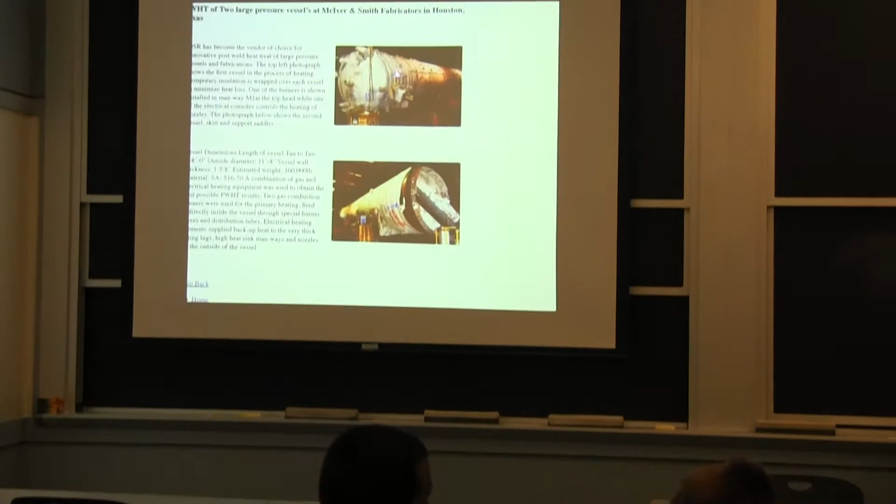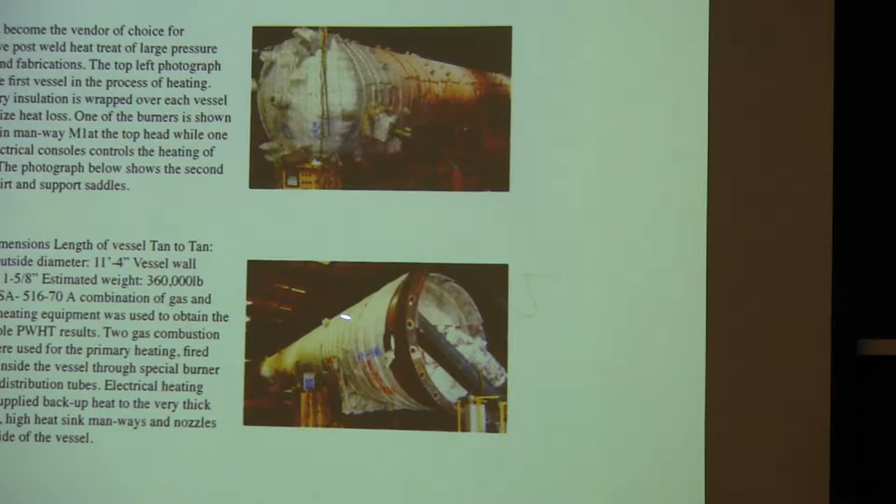Here's a vessel they just wrapped - they put electrical blankets around it, virtually over everything, and then wrapped the whole thing in insulation. Here's another one. If you search online, there's a bunch of pictures of on-site stress relieving.

And it has to be done - you either do thermal stress relief or mechanical stress relief if the parts get very large, because the residual stresses get to be huge. I told you the story about the weld with 400 little welds in it - that big piece came off a 7,500 ton forging press. They didn't do proper preheat or post-heat, didn't stress relieve, and didn't peen - which means hitting it with a little hammer every half inch of weld, beating the surface to introduce mechanical stress relief by deforming it. That's how we used to put together battleships with 14-inch thick armor.

No one remembers exactly how to do it, and no one wants to go build a battleship just to prove how. We don't really know how to weld 14-inch thick armor steels anymore, because all those people are dead.

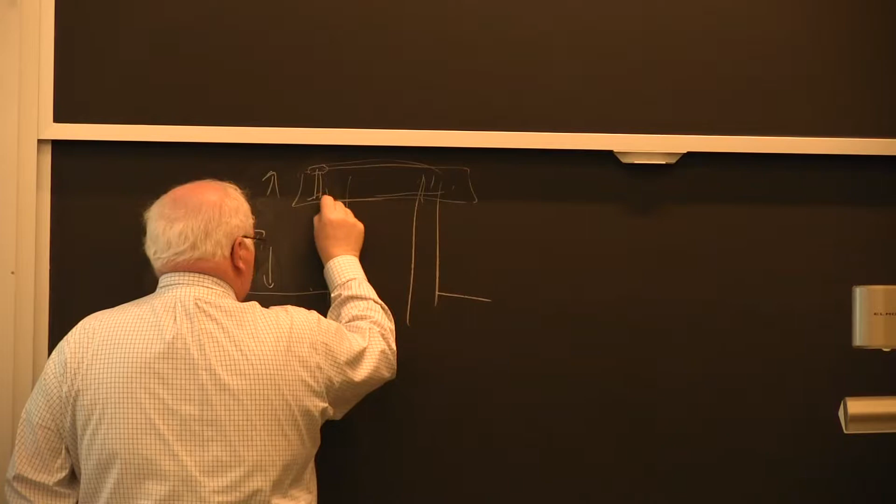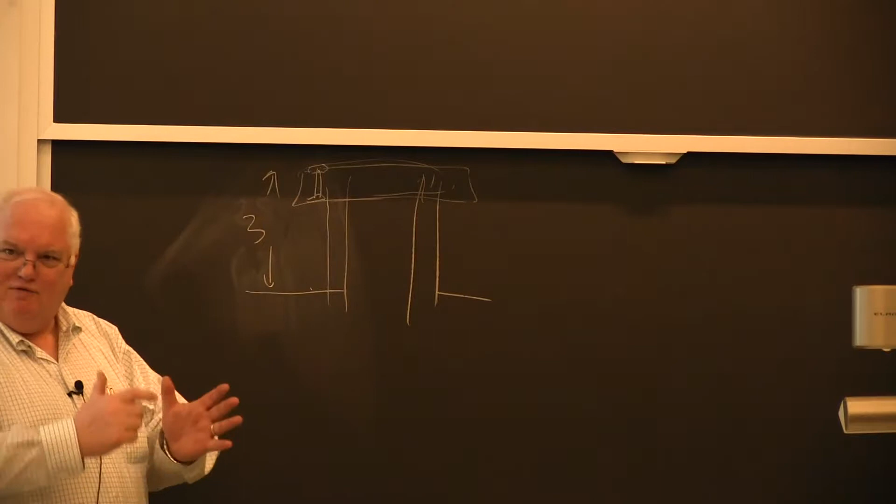And you've got this big set of beams up here. There are like 6 of these I-beams, and they're 10 feet high - that's a story right there by itself. They're 10-inch thick web, and they were welded together out of big forgings. I mean, this is not a rolled beam, okay? This is 10 feet high and 10 inches thick. And they were about, I don't remember, 50, 60 feet long.

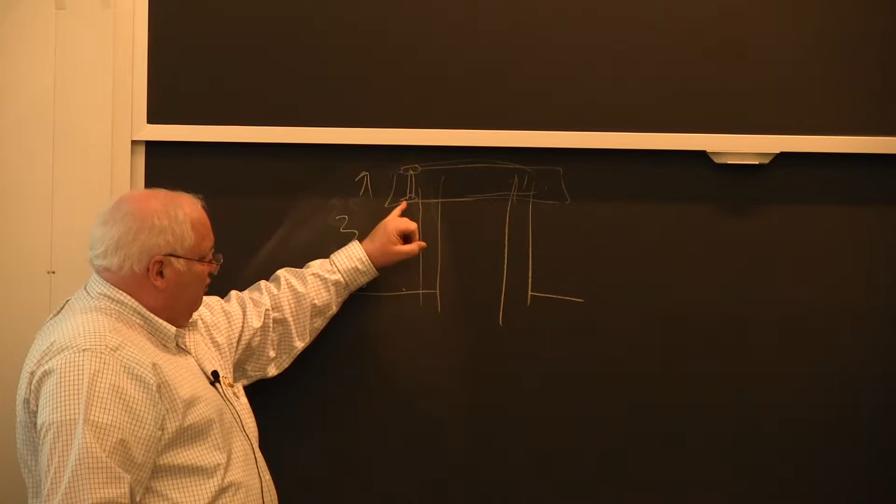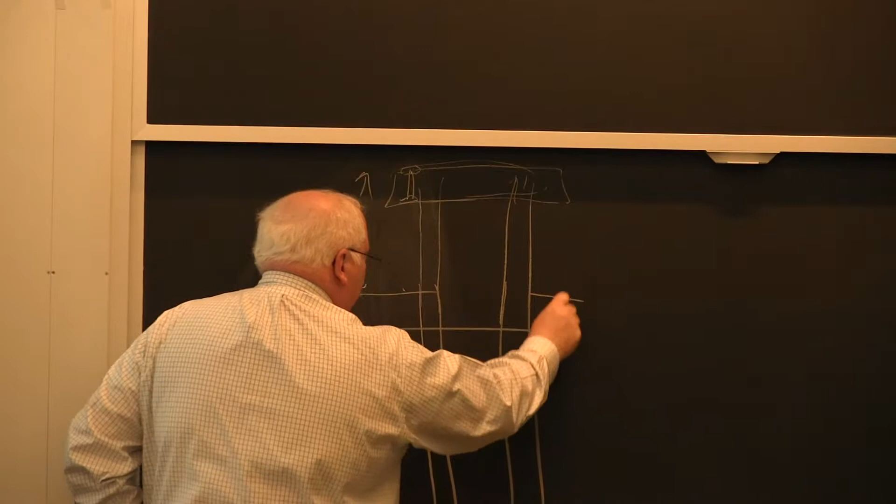And you couldn't make the whole thing as a whole forging itself, because you didn't have a forging press this size until you built the forging press. Anyway, they went 6 stories into the basement. You had this anvil down here that was a huge anvil, huge anvil that you're pressing against. But for all the hydraulics and other stuff, you basically had this thing going 6 stories down into the basement in order to run these.

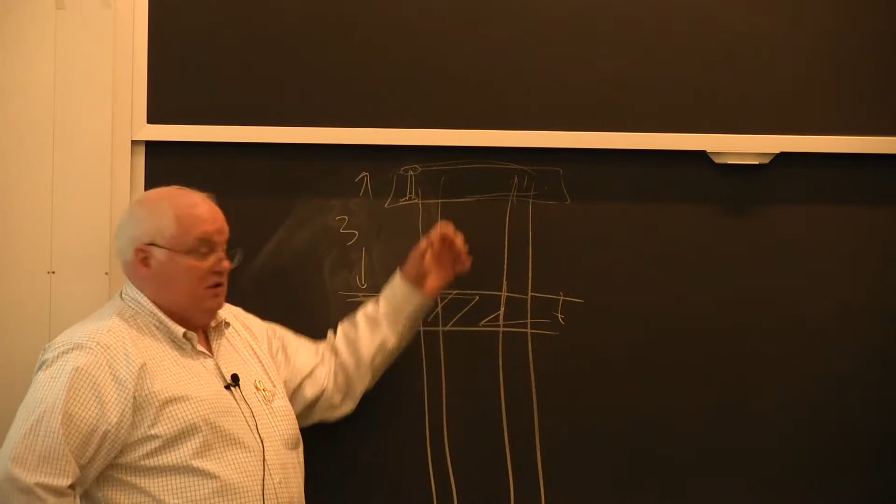This thing has to move up and down, right? So you've got to have another 3 stories going down, and then you've got all the other stuff. Well, the other I-beams down here, which were the same as that, were 6 stories buried into the ground. And so one of them developed a crack all the way through.

Someone was down there doing an inspection. They said, 'Oh, I see a crack. It's 10 feet long.' Okay, and they said, 'That's not good.' And they had 6 of these beams. Well, they had to shut down the machine.

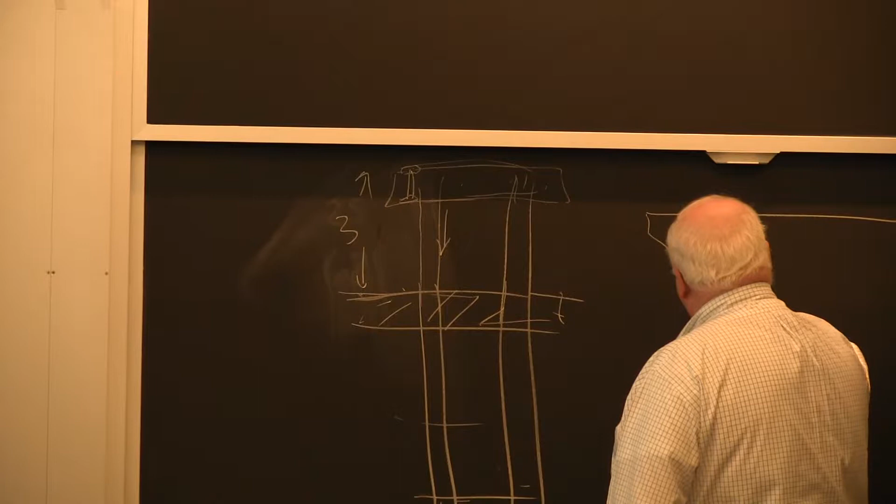Well, it turns out the beams actually from the side had a taper to them, like this. And what they had done is they had welded on a little pad to erect this thing. When you're trying to put it in the pit down here, they had pads on either end just so you'd have something to sit on, because this was a slope, 45 degrees. And they had welded these on. They were about the size of my notebook if you made it into a cube. Okay, they were not small.

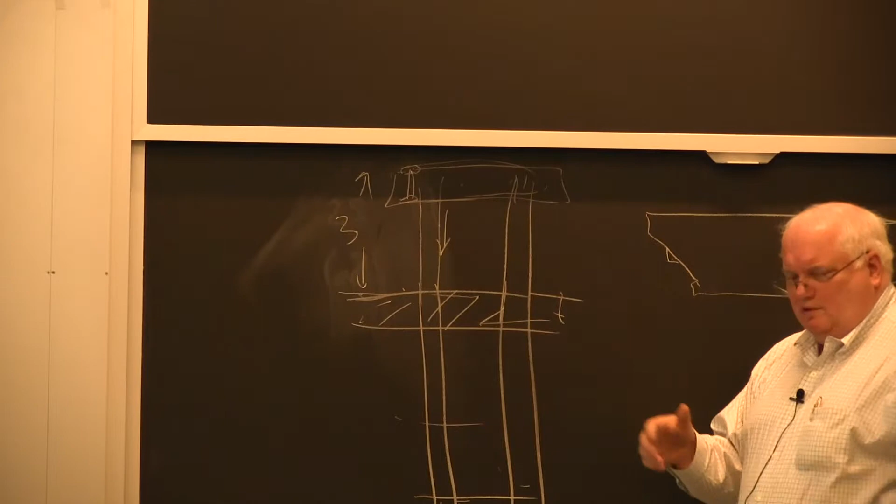They were about 10 inches wide and stuff, and they had welds on there that were 2-inch fillet welds, which means they had yield level residual stresses. And after about, this occurred in the mid-80s, so after 30 years of use, they developed a fatigue crack that started at the toe of one of these and went straight through it - a 10-foot crack.

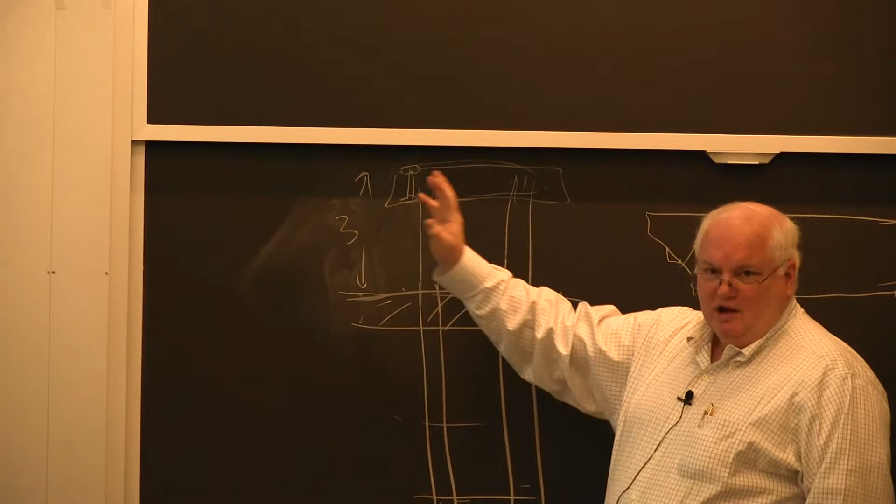Well, to build a new one of these, they estimated, would cost $2 billion. This is the whole thing, $2 billion, because it's not just the machine, it's all the hydraulic pumps and everything else. It fills a whole building, okay, a huge building to do this. And we only own 2 of these in the United States. One at Wyman Gordon, which is now bought by the Germans, okay, and Alcoa owns the other one.

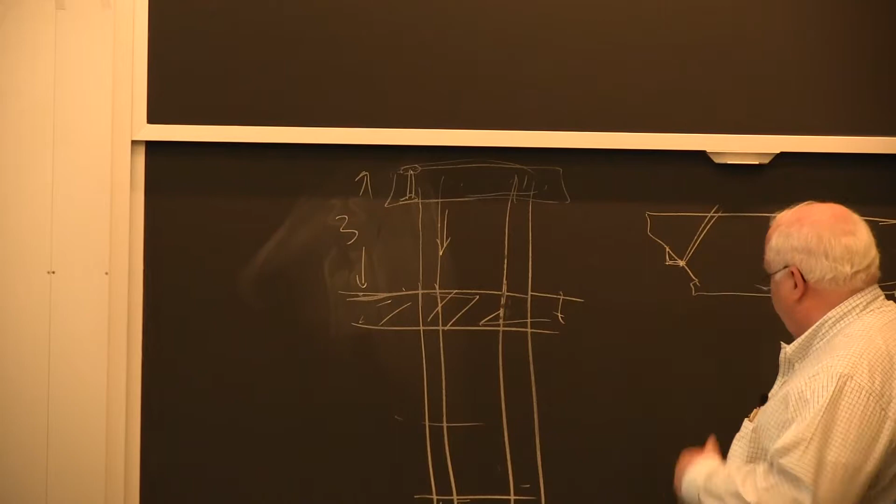Anyway, it was because of weld residual stresses. It wasn't a hydrogen crack. It was 30 years old, but it was weld residual stresses and a stress concentration. The fatigue crack went through here, and I had to go down in the elevator and see this thing. It's a little bit greasy down there, okay, about 2 inches of grease everywhere. But they had an elevator to go down there.

And I looked at it, inspected it, and they said, 'Well, how do we weld this?' And I said, 'Well, you're going to have to preheat it.' Anyway, I went through and helped them, we talked for a couple of hours about what you might have to do and how you're going to stress relieve it.

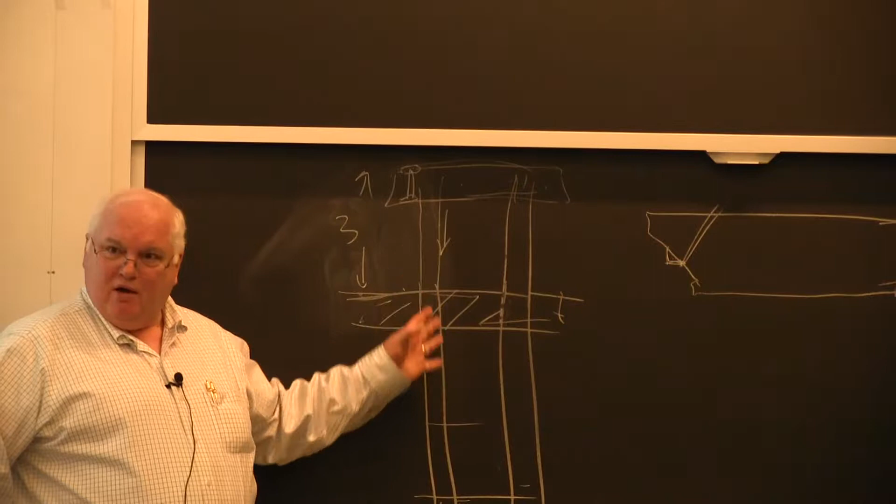And I said, the best thing for stress relief is if you can put it in a furnace, right? Well, can't we do it in place? Because it's not the easiest thing in the world to get a 50-ton beam out of the 6th floor basement when the only access you have is an elevator shaft. In fact, they were going to have to disassemble a fair amount of this forging press in order to even get the beam out of there.

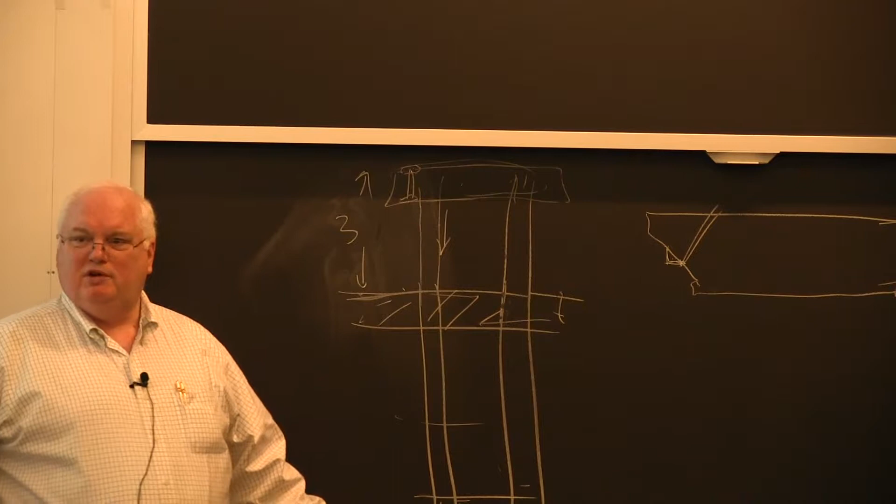Eventually, they did decide to spend the millions of dollars to rig it out, weld it, stress relieve it in a furnace, and put it back in. Cost tens of millions of dollars to make that repair weld.

They had to grind the crack open. I mean, this is 10-inch thick, so this is going to be a 10-inch thick weld. So you've got the two pieces, and you're going to have to prep the ends.

So we discussed weld prep. You saw the one I had that I passed around, and you don't do a 45-degree angle because then you're going to be putting in tons of weld metal. You do a narrow groove instead, and should you do a straight bevel or can you do a compound bevel? Where you have two different angles that you machine on here, or you do a J groove—there's lots of things you can do. But those are ways we were talking about how to minimize the amount of weld metal, but still have enough angle that you get good fusion. Go to a straight-sided weld, you won't get good fusion.

We do have something called narrow gap welding. The Japanese spend a lot of time and money on narrow gap. We use it on the surfaces of aircraft carriers. The top deck of an aircraft carrier is 4-inch thick steel. So we use narrow gap processes, but you've got to develop the procedure, and it could take you a year to develop a good, reliable narrow gap procedure.

Yes, Jonathan. They could.

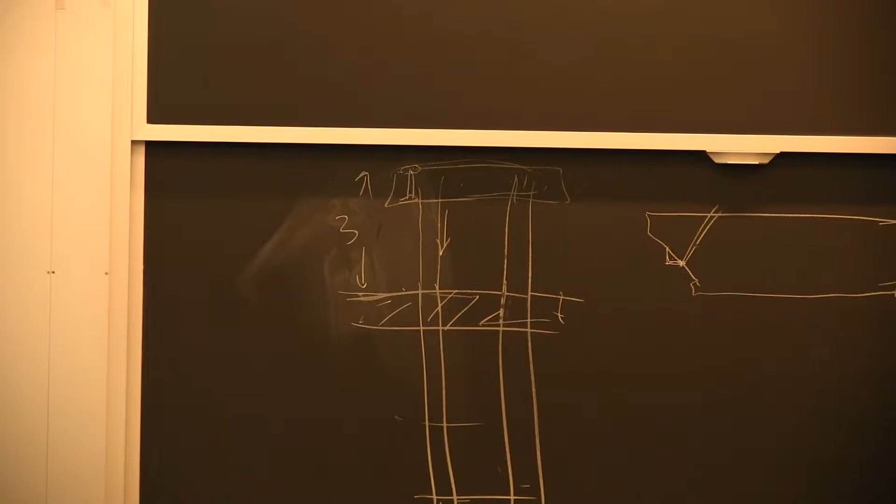A new forging will probably have a 1.5 year lead time. They thought about that, but they didn't want to be down for 1.5 years. They got all this turned around in about 3 months. They were doing all the economic analysis on whether to go buy a new one, but buying a new one doesn't solve it, because it was still welded together up there too—the flanges were welded to the beam, so you still had to weld the thing.

And the thing is, it had been welded in 1950. In fact, I found an article from 1954 in the Welding Journal that talked about this, because it was such an unusual weld at the time. They made a special feature article in the Welding Journal about building these presses.

Well, come 1985, when we needed to weld them again, we had to find out—so we were going back looking through the literature to see what procedure anybody used. They had lost the procedure. It can take months to develop a procedure. Well, it did take about a month, and it wasn't just me—they must have brought in half a dozen consultants, because it was tens of millions of dollars.

Okay, yeah, what other questions? Yep.

Oh, this forge will do titanium, steel, whatever you want. It's just 50,000 tons. Once you've got a 50,000 ton hammer, you can put anything under there. It's just a question of what dies you put in and how fast you run it—you change your parameters for forging aluminum.

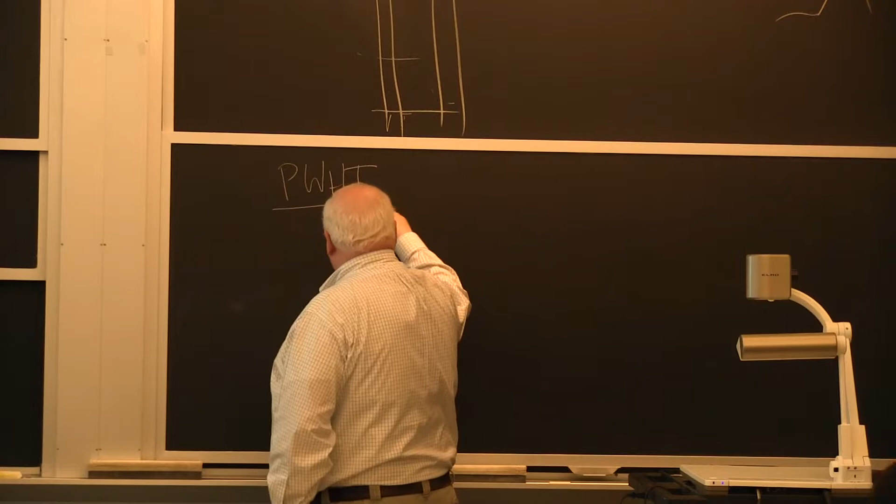Now, we've talked about preheat. We haven't talked as much about post-weld heat treatment. I think I may have told you this already: there are 3 reasons to temper.

You temper the steel for low hardness. You lower the hardness, and I like to just call it HV, Vickers hardness, but it can be Rockwell C, whatever. You also temper it to relieve residual stresses.

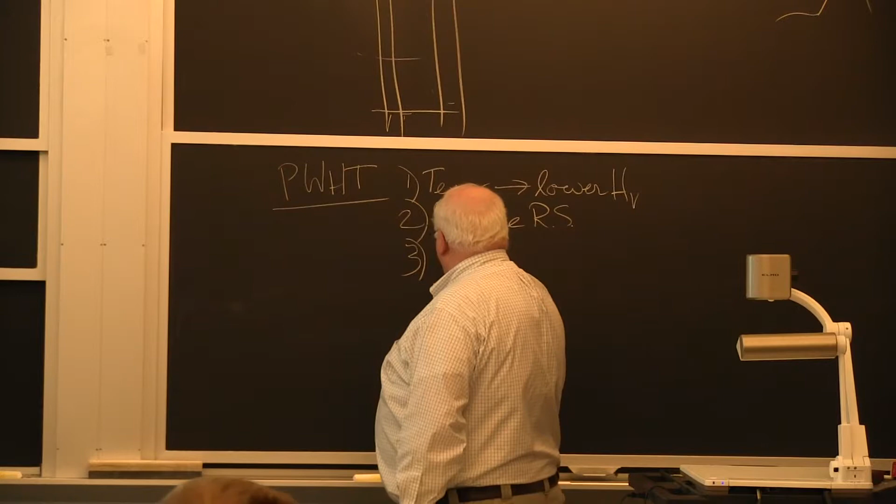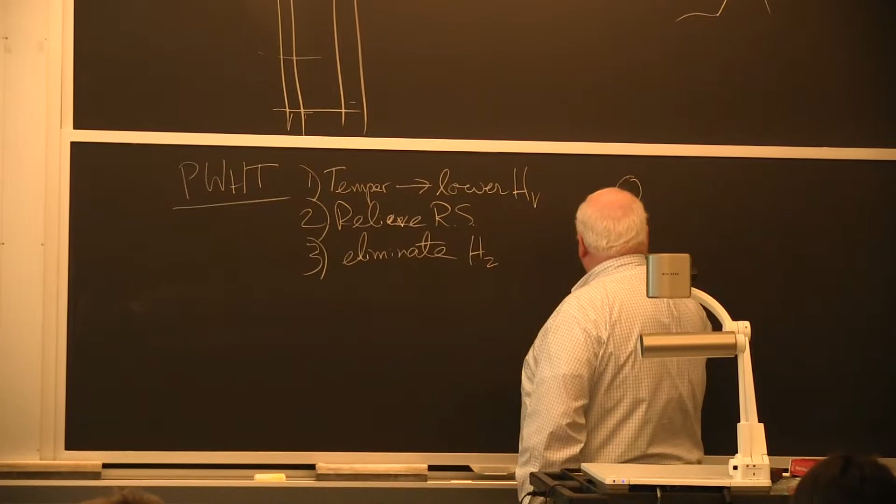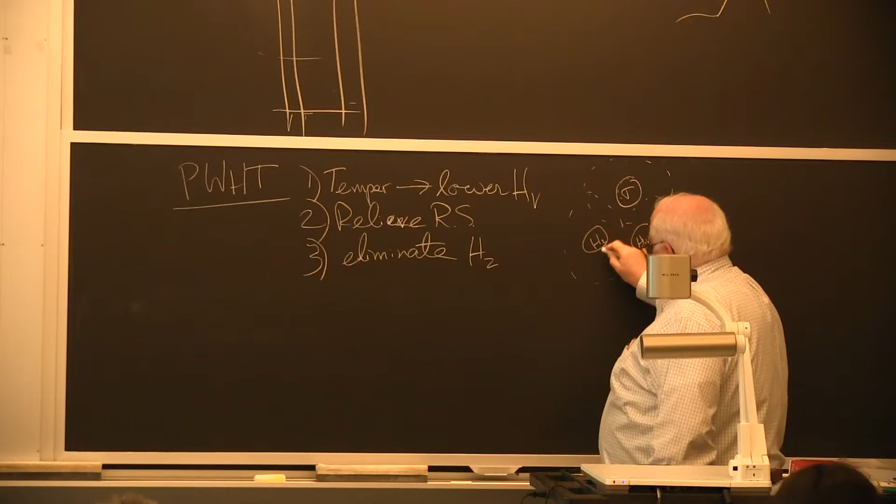And the third thing you do is you eliminate hydrogen. So on this one, think of the Venn diagram, I had a little circle and a little circle: I relieved the stresses, I've reduced the environment, and I've reduced the hydrogen. I've reduced the hardness. So this is hardness HV, stress, and H2. By post-weld heat treatment, I do lots of good things. And if I properly post-weld heat treat, I probably won't get a hydrogen crack.

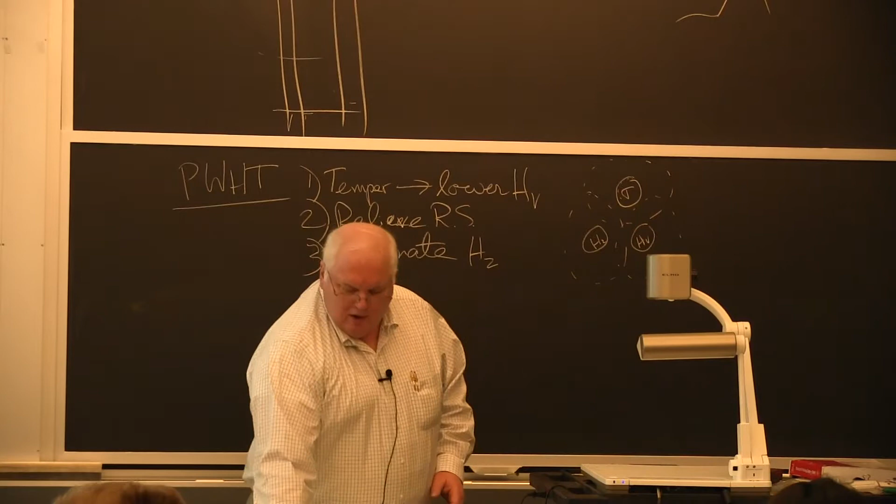And I told you about the Helms project, about that. Now, how do you do it? What procedures do you use? Mike Baumforth was talking about the structural welding code yesterday.

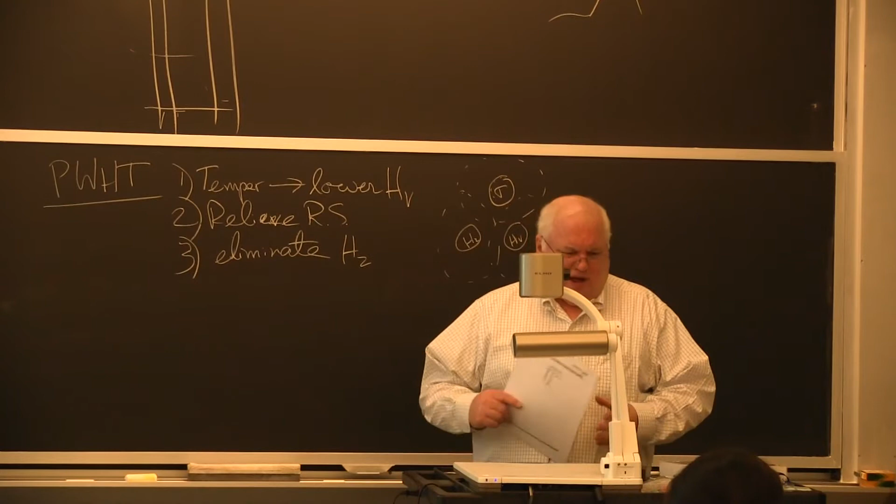And here are some of the welding procedures per the structural welding code. Mike mentioned that you can take the certified welding inspector exam by either doing the standard of API 1104 or the structural welding code. There's another code, and he showed you the API 1104, which is this little thin thing, but actually it's more complex than this one. But the other code that's used most often is the ASME boiler and pressure vessel code.

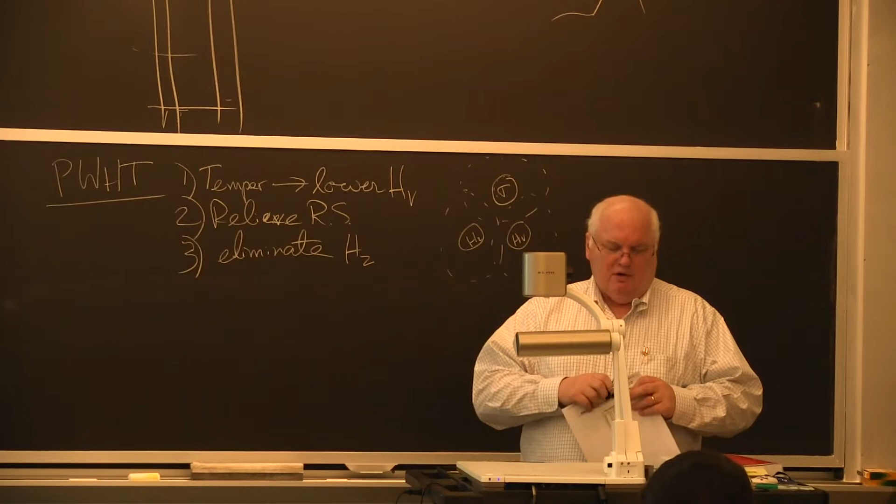The problem with the ASME boiler and pressure vessel code is it's this thick. If I take all the parts of it, you don't want to take a full day exam or a 3-hour exam on the boiler and pressure vessel code. You probably need about 5 years experience daily to understand it. It's sort of like the US tax code—there is no one who understands the whole thing. It's just a little too complex.

It's the granddaddy code. It's like 105 years old, and it is the highest quality standard, because if a pressure vessel blows, it does really bad things. Which leads me to another story.

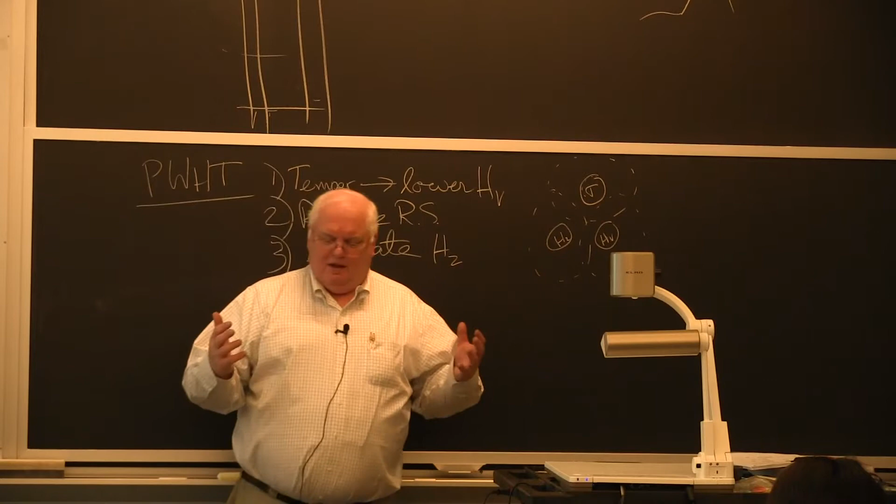So a few years ago—it's like 15, no, 20 years ago now—I'm sitting in my office. I was actually department head at the time, and I get this call that they had an explosion up in North Andover. It was only 16 tons, and it was only a quarter mile away.

No, that was me. That was me. But, well, Ron may have done it later.

They actually took me out of it because I became sort of a fact witness. I was one of the first two people down in the pit when they finally cleared out enough space and had a crane. The other guy was the chief engineer for Travelers Insurance, and I was the other. We were the two guys who got down there first to look around and say, a lot of trash down here. That's about all you could see.

But anyway, so this pressure vessel was a hot isostatic press, and it weighed about 300 tons. It had a shape, it was threaded at the top, and also threaded at the bottom, and the top cap and the bottom cap were 50 tons each, and the cylinder was 200 tons, as I remember. I think it was about 10 or 12 inches right here, and it opened up here to about 28 inches at the top.

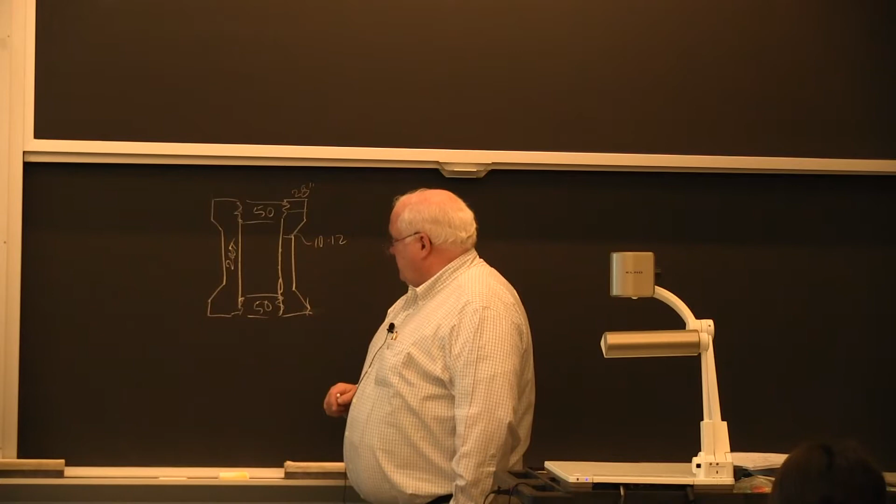And they had designed this in the mid-'80s on a Cray supercomputer. A Cray supercomputer is probably a $500 PC today, in terms of computing power. But they had done all the thermal stresses on this. This is a hot isostatic press.

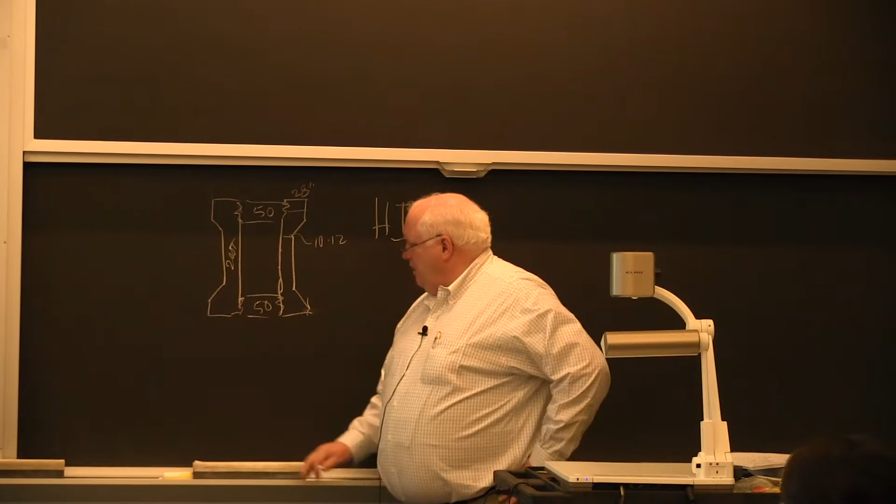And if you take my thing on casting and it ends up a little bit on forging, I'll probably tell this story on that video, maybe in a little more detail. But it had been operating for a number of years.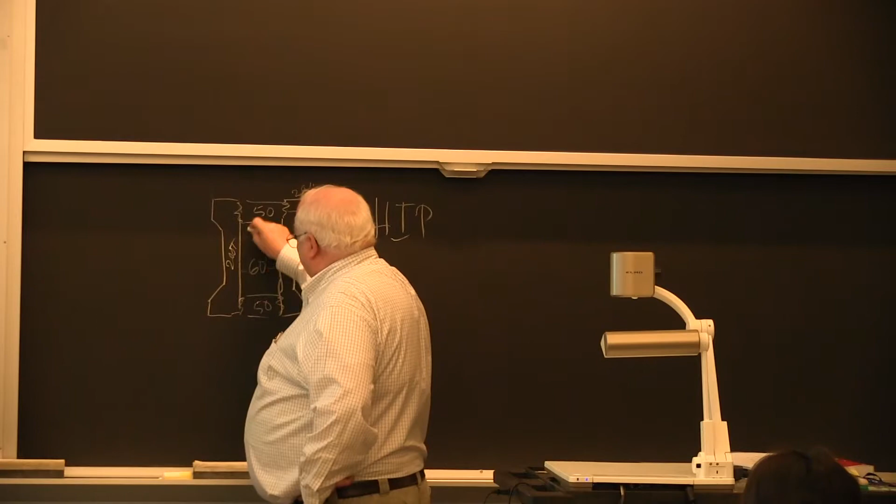The inside diameter was 60 inches, and it was probably 20 feet tall or something on the inside. It wasn't a small vessel. It weighed 300 tons, the whole thing.

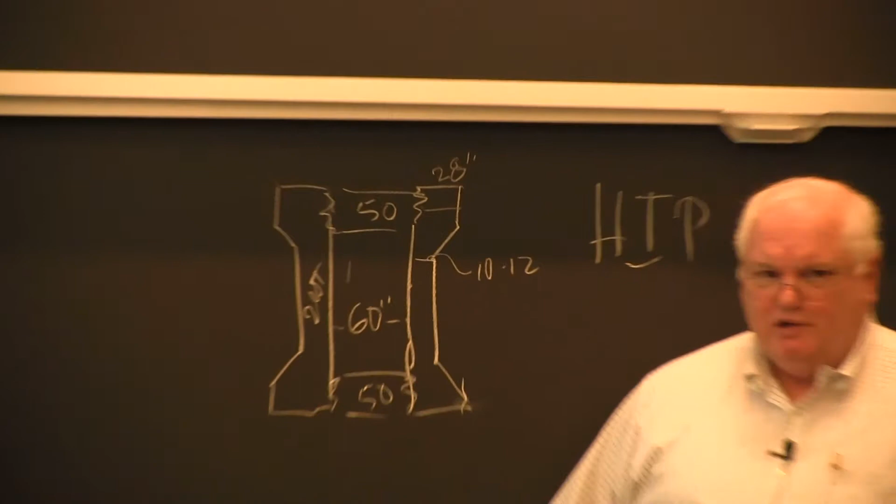It had been forged in Japan by Japan Steel Works, one of the only places in the world that had both the steel making technology and a big enough forging press to do this. We had big forging presses, but Alcoa doesn't forge a lot of steel in Cleveland. Wyman Gordon, you'd have to make the steel over in Japan and then bring it over here. The Japanese have some, maybe 30,000 ton forging presses.

So they had forged the pieces, and you basically usually make something a little bit longer. They call it a prolongation on the forge. So you can cut it off, and you can cut out tensile specimens, Charpy impact specimens. You can do all your quality control tests on the heat treatment. So they did that, except it failed the mechanical properties after the heat treatment.

Darn, okay? I could scrap it. That's only going to cost me $20-30 million. Or I can just reheat treat it. Now, how do you reheat treat it? Well, you don't have exactly the same chemistry. Well, you take something that's very similar to it.

You can't weld on a prolongation on something like this. So you just take a piece of the material and put it in next to it in the furnace. But that doesn't cool exactly the same way as this piece. I mean, this one's 200 tons, this one might be 2 tons. And so they cool differently, they get different grain sizes. This one, the second time they heat treat it, passes. Great. Okay, ship it. So they do.

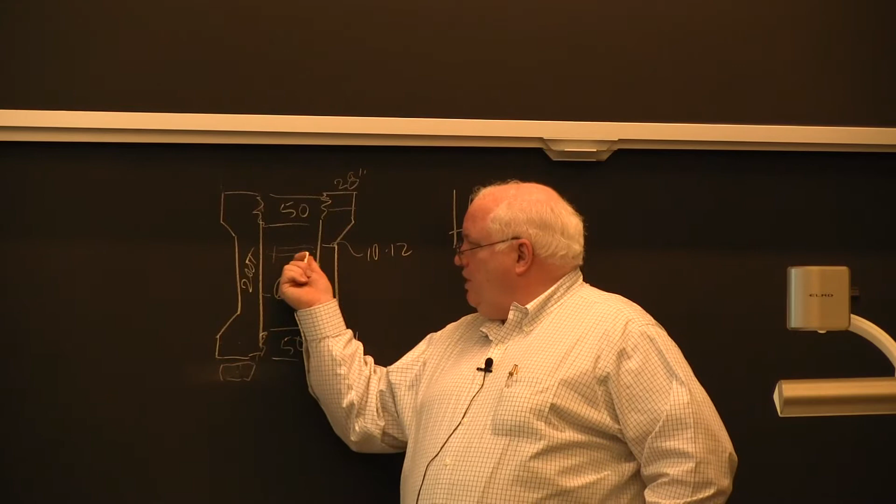So you put more than one cylinder in, you put a bunch of cylinders in. It was also very convenient, it was 60 inches, and that was just big enough for all the discs that Pratt & Whitney and General Electric and everybody else were going to make for some of the big jet engines.

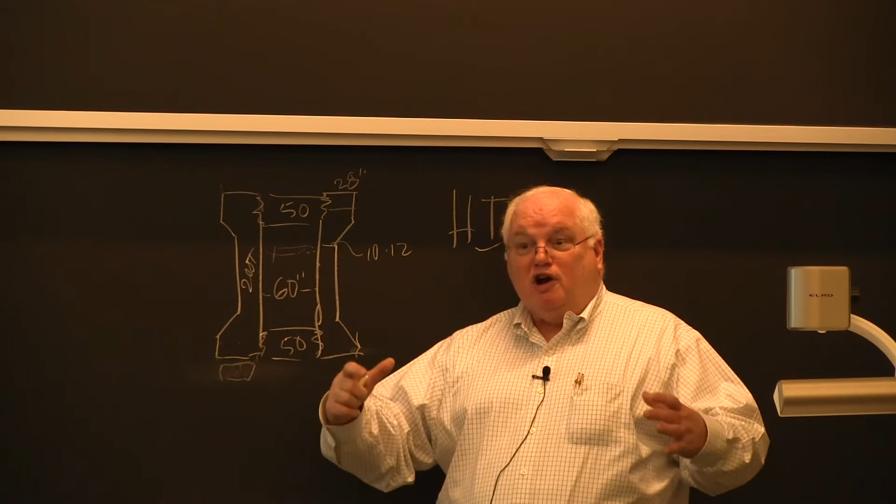This thing went, and it was the only one in the world of this size for 3 months. Fortunately, people were building another one because all the jet engines were going into high bypass engines and stuff, big fat engines.

This thing couldn't keep up with all the work that was being thrown at it. So about 3 years before, they had started ordering another one. Fortunately, when this thing let go, the other one came on stream 3 months later. Otherwise, it would have been 3 years before anyone in the world could have built an engine. Pratt & Whitney, Rolls-Royce, think of the damages here. So fortunately, they had the other one almost ready to go.

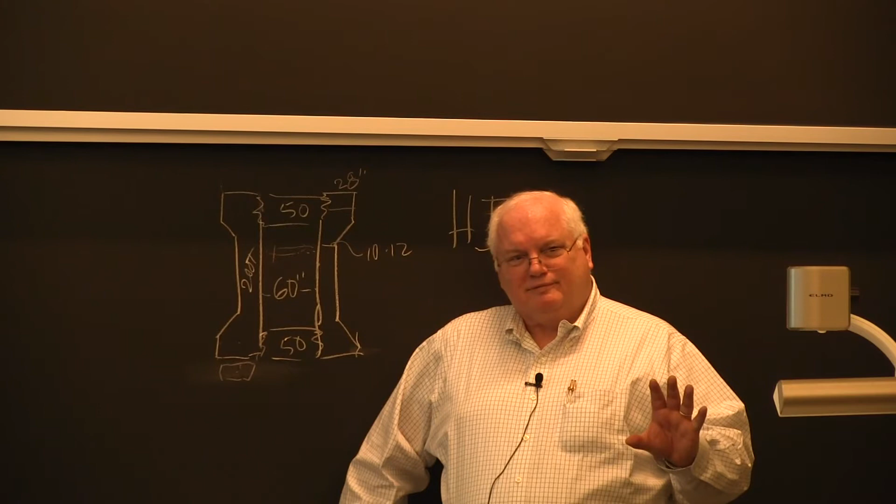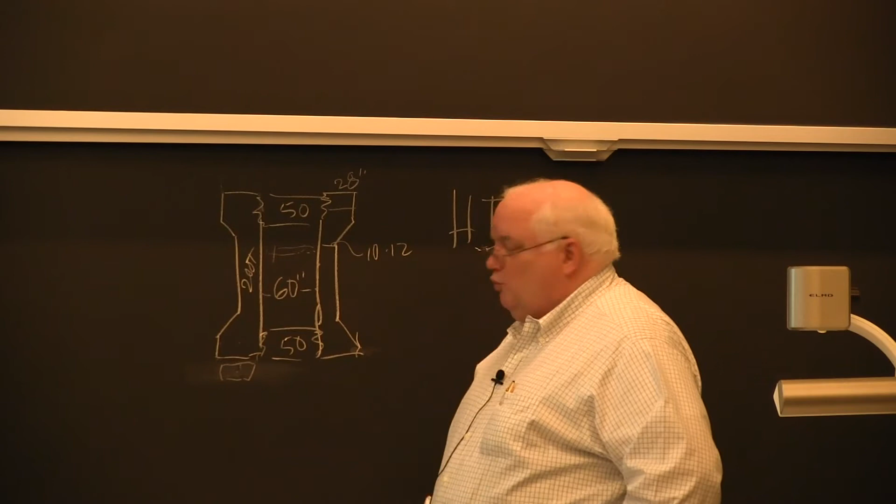They've replaced this one and other stuff, because there was no other unit that could take something that big around. But anyway, so it lets go. But why did it let go? Well, it turns out it's partly a hydrogen cracking story. It's not a welding story, but it's a hydrogen cracking story.

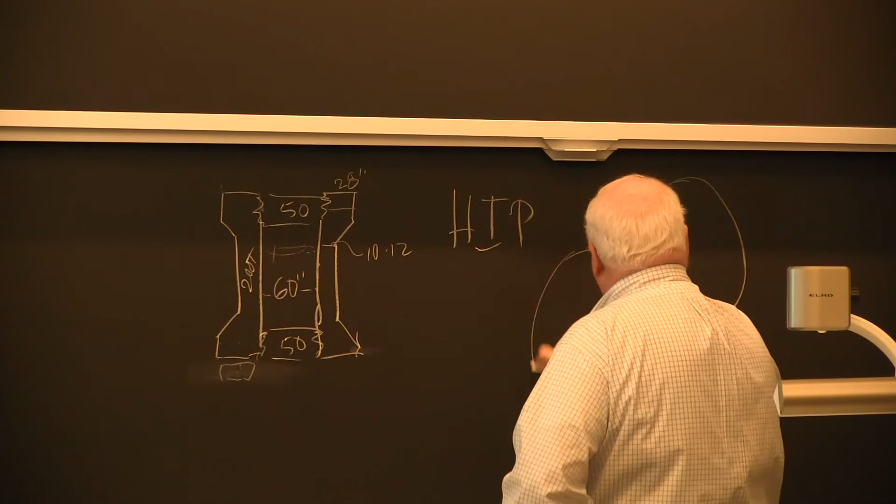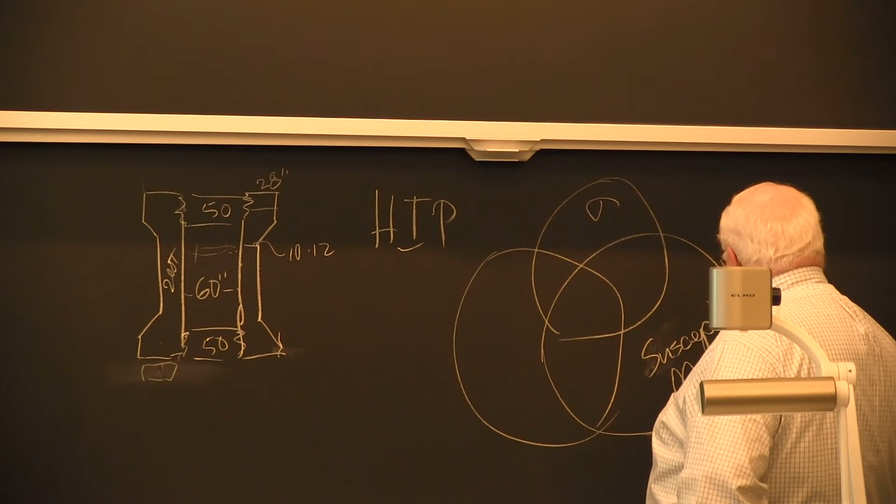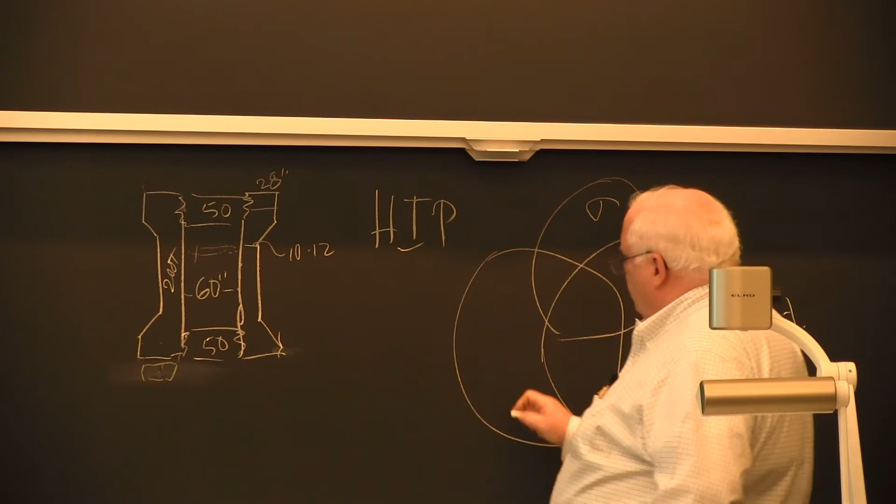There were 3 things. For any time, they called it stress corrosion cracking, so I might as well call it stress corrosion cracking. In stress corrosion cracking, you have to have a stress, you have to have a susceptible microstructure. So it's not hardness, but it's sort of the same thing. High hardness, susceptible microstructure, in this case low toughness - read low toughness there. And then you have to have a source of hydrogen, and you'll get stress corrosion cracking.

If you did the fracture mechanics on this thing originally, it had about a 12-inch critical flaw size if it had the toughness that it should have had when they did the heat treatment. But it didn't have that toughness. They took Charpy specimens out and it failed. So they redid it, and this little piece passed - that little piece had enough toughness.

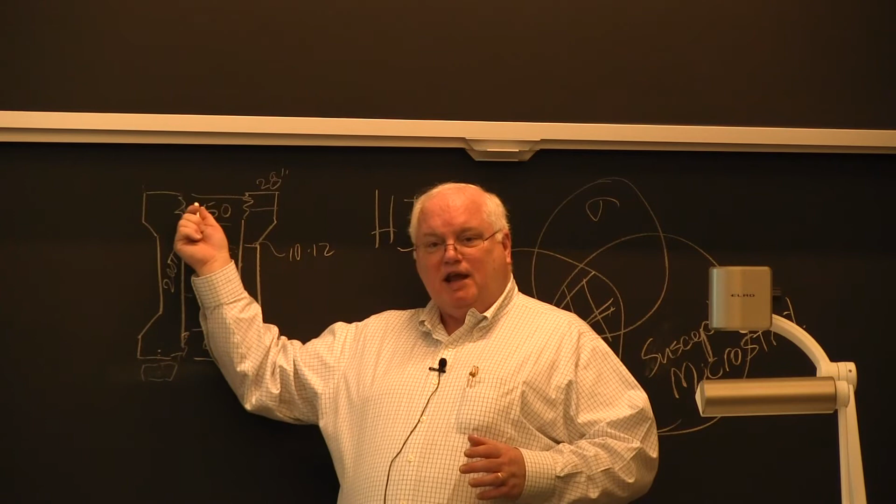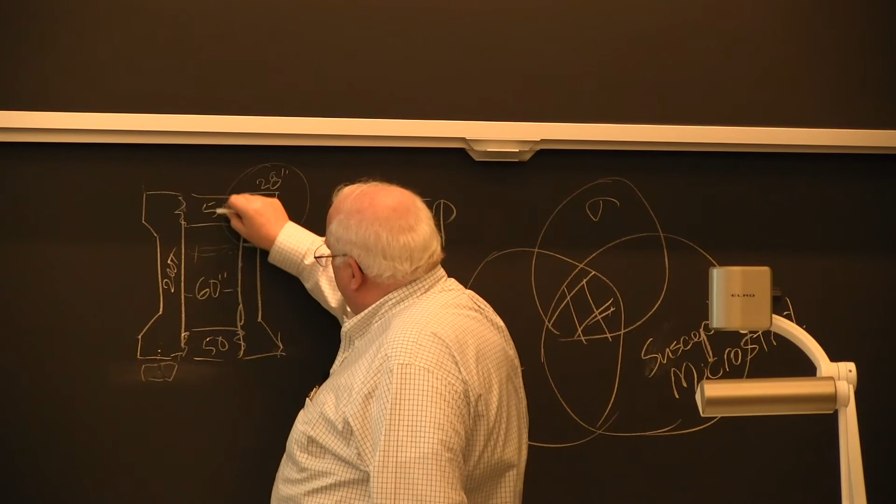But guess what? When they went out to test this thing after it exploded, one of these pieces - that's right - the crack ran right from that corner, stress concentration, and it just ripped off a piece about 1/3 of the way around. It weighed 16.5 tons, and it was found a quarter mile away. Took a lot of energy to move 16 tons a quarter mile.

Another 5-ton piece - actually, we pieced the whole thing back together. Not actually, if you want, I'll tell you how you piece something like this back together. You don't piece it back together. You don't pick up 5-ton pieces. But it was in like 70 different pieces.

So basically, the average piece - 200 tons, 70 pieces, that's 3 tons per piece, right? Pretty heavy.

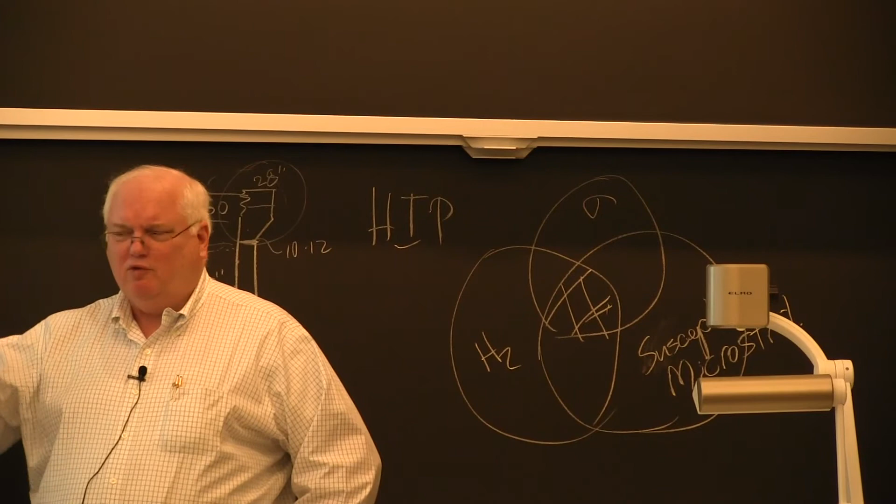One 5-ton piece landed right on top of the operator's chair. It happened at 2 a.m. in the morning - this thing runs 24/7, right? The operator had just seconds before gotten up to go change one of their chart recorders, the paper on the chart recorder. If this had happened 15 seconds earlier, he would have been underneath the 5-ton piece. He was sort of rattled, but it landed right there next to him. Anyway, the chair was not in very good shape.

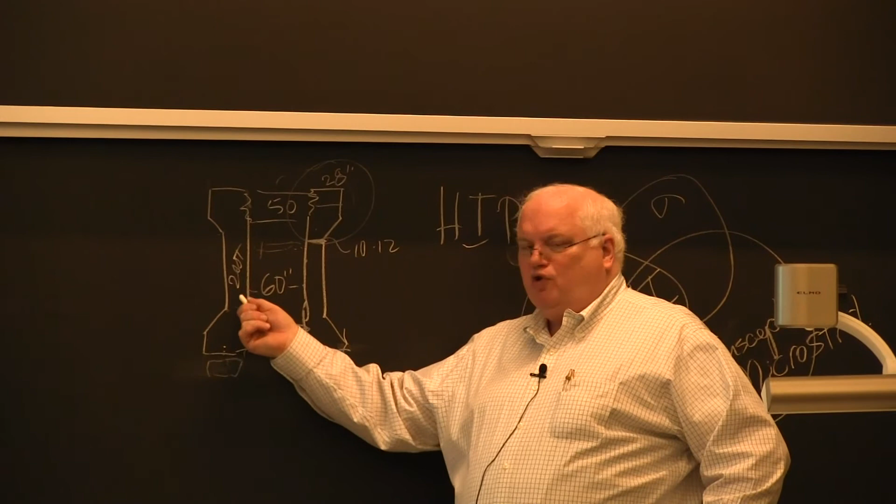Anyway, what happened? Fracture mechanics and everything - you try to design something like this for a leak before break. A leak before break means if you get a crack, it will grow and grow until eventually it will create a leak in the vessel before the vessel just blows up as a brittle fracture. You want it to leak before it breaks. Break before leak's not good.

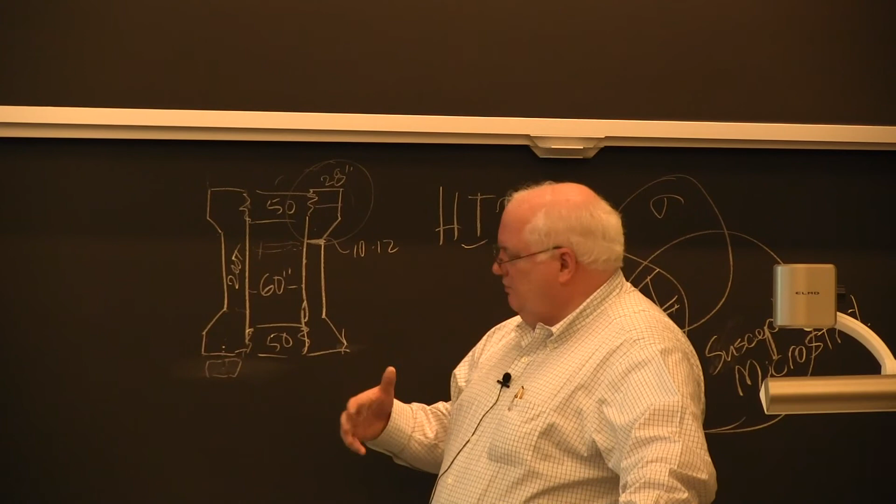No warning. In fact, on pressure vessels, if you read the ASME code for pressure vessels, they actually impose duties to have a leak that warns you that whatever's happening in the vessel, that it will leak before. And typically, the leak - this thing has 20,000 psi argon inside it. The argon is compressed as a gas, but it has a density like liquid. If you start calculating 20,000 psi and stuff on argon.

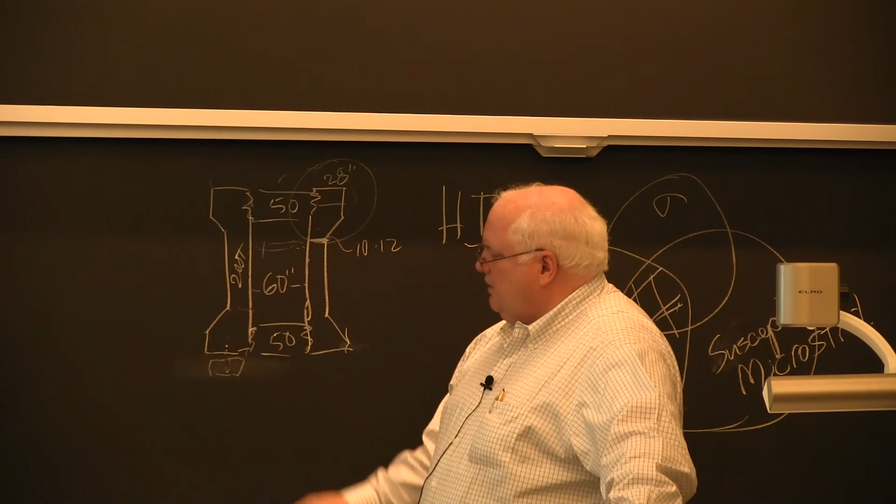But anyway, you're using all this, and it should have had about a leak before break of something. It should have leaked before break on the original design if it had the toughness. The toughness is equal to...

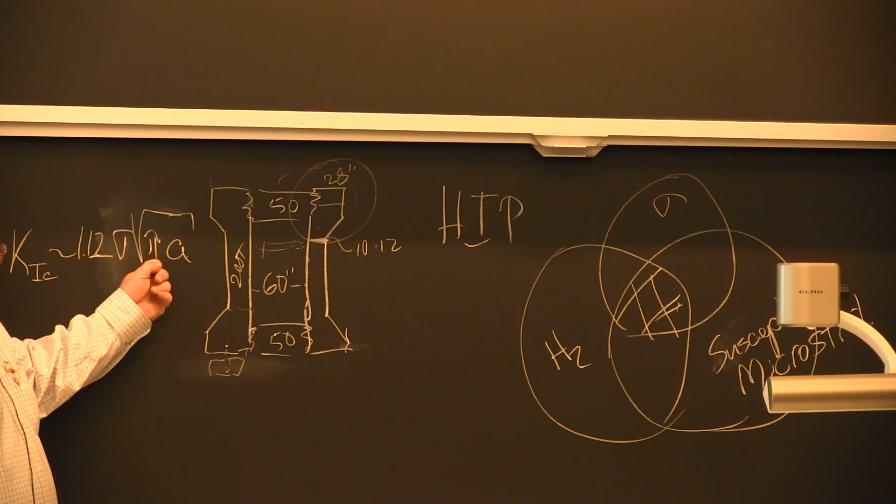K1C is proportional to - well, I'll just call it, if you want to be precise, but it's not precise - sigma, square root of pi a. 1.12 for a planar crack: stress times the square root of pi times half the crack length, or half the crack depth. A would be the crack depth. It should be about 10 inches or greater. Pi is the constant, sigma is the stress. We know what the stress is when you're under 20,000 psi. They've done this finite element model.